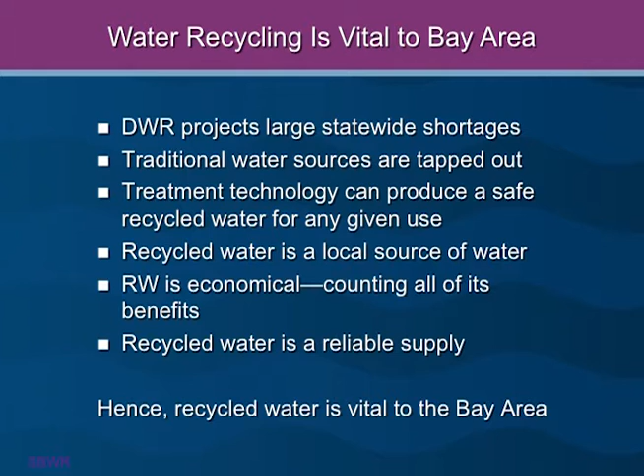Recycled water is a local water resource. We produce the raw material for it, so we are not at the mercy of somebody else to import the water from. It is economical - counting all of its benefits, it is economical. That's why there are over 300 systems like South Bay Water Recycling. South Bay Water Recycling is one of many in the state that does this, and they have been doing it, they continue doing it, and they wouldn't be doing it if it were not economical. Recycled water is a reliable supply, even during drought. As long as we flush the toilets, there is a raw material to produce recycled water and serve it to the customers. Because of all this, recycled water is vital to the Bay Area.

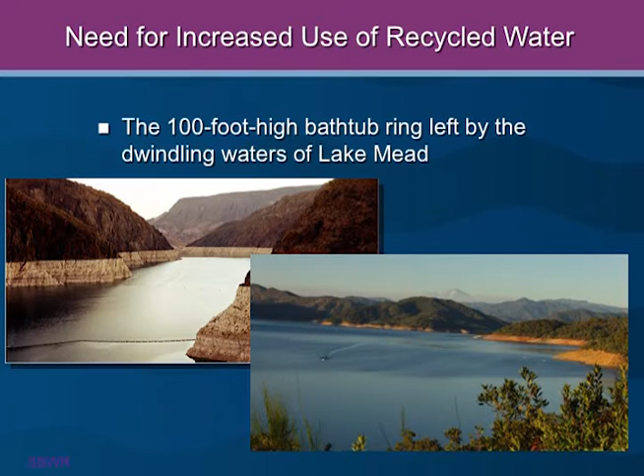Some other pictures. I mentioned the Department of Water Resources projections of water shortage in the future - this is the graphic I promised you. In the year 2000, our shortages were about 3 million acre-feet per year in normal years, going up to drought conditions of 8-9 million acre-feet per year of deficit. An acre-foot of water is a lot of water - it's about 326,000 gallons, so millions of that unit is incredible. An acre-foot can supply 2 families in a year, 3 families in some places. So as the years go by, it gets worse. 2010, 2020, these are projections. I don't have 2030 projections, but if we don't do anything about it, it gets worse every year because our population keeps increasing, our demand for water keeps increasing, and yet our supplies are relatively constant.

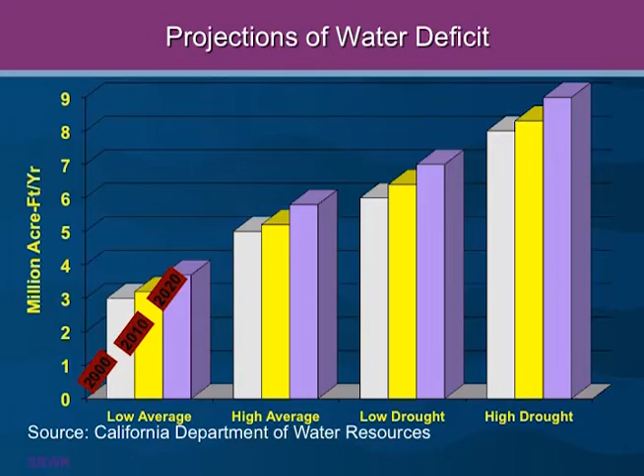So how do we make up for this deficit? There are several things that we can do. The Department of Water Resources projects doing all of these activities in order to make up for those deficits - you can read them for yourself. These are all very big projects, and each one has some yield that can help make up the deficit in future years. Water recycling is a major one of those, and it can make up almost 1.5 million acre-feet per year by the year 2030. That's about half of that normal year deficit of 3 million acre-feet per year that I mentioned. It's quite significant, isn't it? It's a big part of making up our shortfalls. And you should be proud to be part of this system of making up for the deficits in water for our future generations.

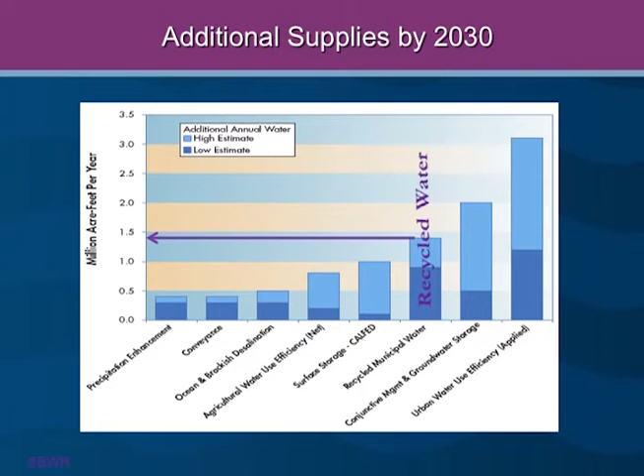What is recycled water? It begins with drinking water. As we drink the water, as we use it for washing, for cooking, for showering, what have you, at homes, businesses, and industries, it becomes wastewater immediately. It's taken into the sewer lines and taken away, carrying all the dirt and the microbes with it, and it goes into a central treatment plant.

In this case, it goes to the San Jose, Santa Clara Joint Wastewater Treatment Facility at the end of Zanker Road. I would invite you to arrange for a tour of the plant. It's a very nice, modern, high-tech treatment facility that produces excellent quality water, and adjoining it is the Silicon Valley water purification system that goes even further and produces even purer water to blend with your recycled water. So it's a good tour to take.

Treated wastewater was historically discharged to the San Francisco Bay at the very bottom. Because of environmental concerns, the water recycling program was initiated to reduce the amount of discharge. But fortunately, it has become a big water resource for us as a result. So it served two purposes. Some of it's now becoming recycled water, and it's used in parks, golf courses, and other places for reuse.

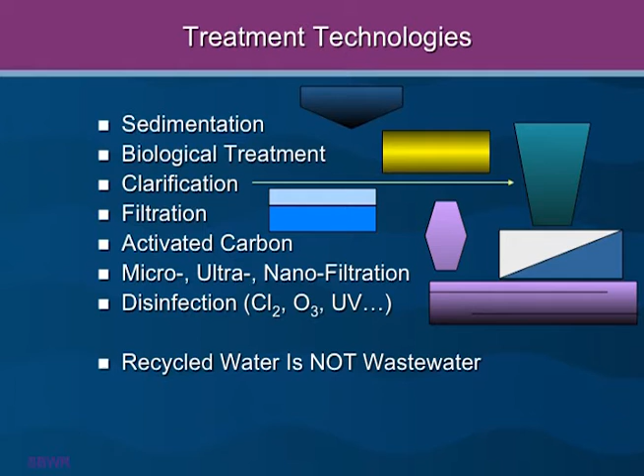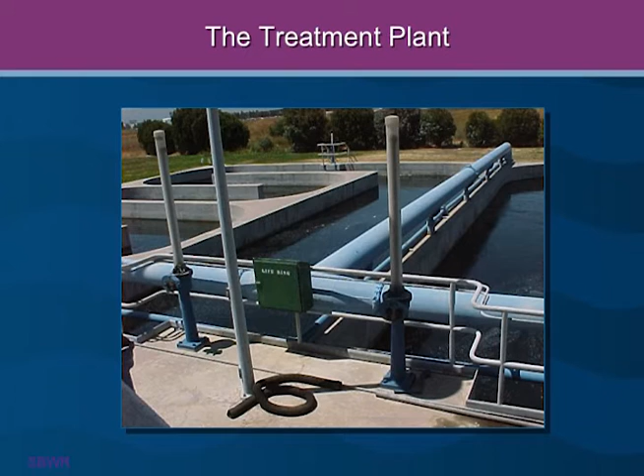This is an image from a portion of the treatment plant at the end of Zanker Road, and again, as I said, it's a good place to visit. This picture shows the biological treatment step that I mentioned. After sedimentation, it goes through biological treatment.

This is where we supply air, in some cases oxygen, from the bottom of the tank, so the air becomes mixed up with the water, and that provides the microbes with the oxygen they need to thrive, to survive, to keep reproducing themselves, and to eat up the organic matter. The organic matter, which is our waste product, is their food. They eat that up, it becomes part of their bodies, they die off, fall to the bottom, and become sludge. Sludge is taken away and buried.

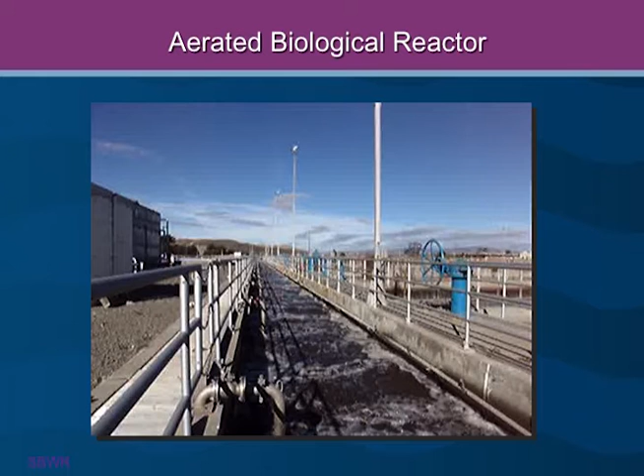So what remains is water that doesn't include the organic nasty stuff that was there in the first place. That's a very important step. Almost every plant includes that step because it's so efficient at removing organic matter.

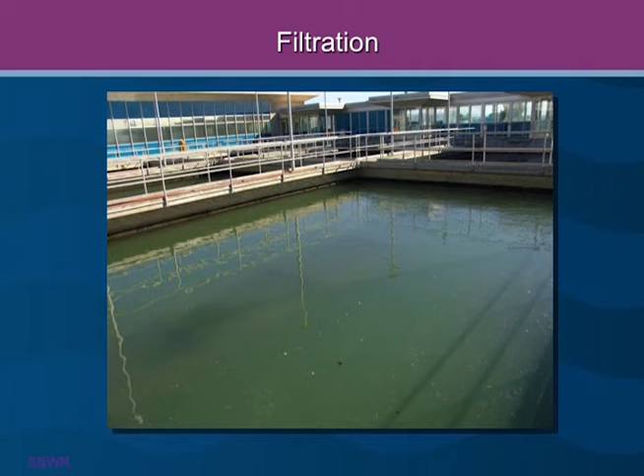Then the filtration step—it looks like a swimming pool, but what's underneath the water is a layer of fine sand about 4 or 5 feet thick, through which it gradually, slowly goes. As it goes through that sand filter, it leaves behind any suspended particles, including bacteria, but not necessarily viruses. Viruses don't get caught, but protozoans, bacteria, and so on get caught.

This disinfection step looks like this: a serpentine path through which the water flows very slowly. It's supposed to provide, by law, at least 90 minutes of contact between the water and the chlorine so that a complete kill is accomplished. And we know that we have accomplished that if our daily measurement indicates less than 2.2 total coliform per 100 ml of water coming out.

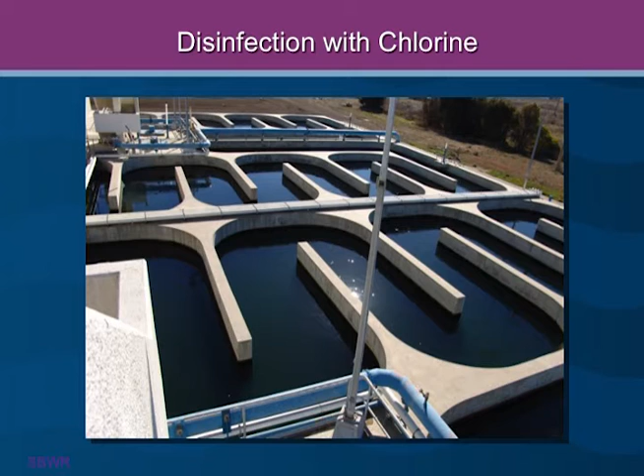That's a standard that is pretty universal for the kind of uses we're talking about here, which are very close to human contact. At the end, we get disinfected tertiary recycled water, which is the kind of water you get at your site. It's clear, you can see through it, and the foaming is because of the chlorine off-gassing as it falls off the weir.

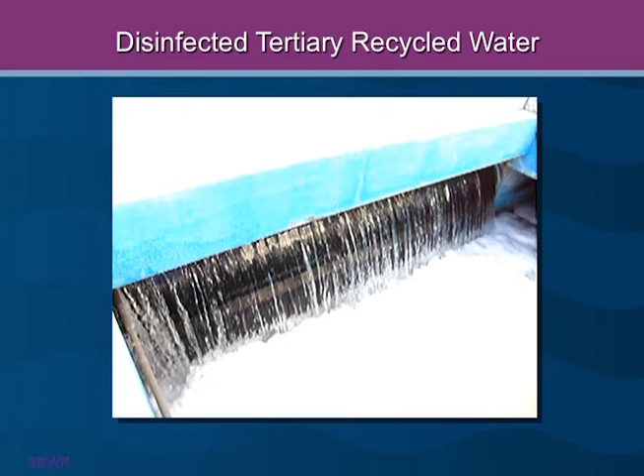What does treatment accomplish? The treatment system accomplishes different things. Each of those steps does something different, and they are all vital. The sedimentation step removes solids, heavy metals, larger particles, and floating stuff that comes in at the beginning of the treatment system. The biological treatment removes the organics—as I said, the organics are eaten up by the microbes; it's their food. That's how we get rid of the organic matter.

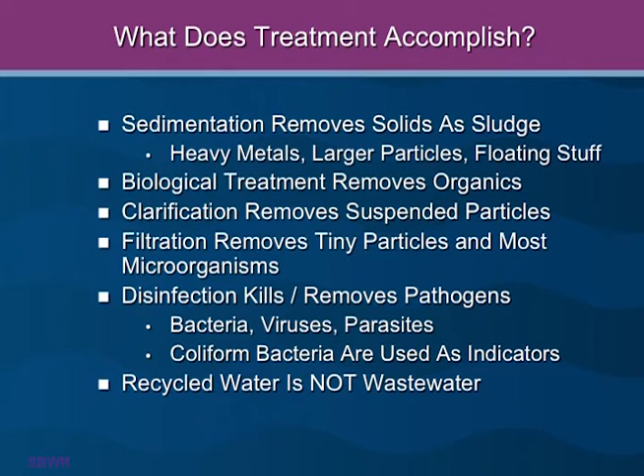The clarification step removes the suspended particles. The filtration step removes any tiny particles still left after the sedimentation and clarification steps, clarifying the water further. Finally, the disinfection step kills, by oxidation, the remaining microorganisms, especially viruses that might survive. So again, I repeat: recycled water is not wastewater and has no relation to it anymore.

The treatment process is shown graphically in this picture. Wastewater comes from businesses and homes. Primary treatment is where the heavy stuff gradually falls down. Looks pretty yucky, doesn't it?

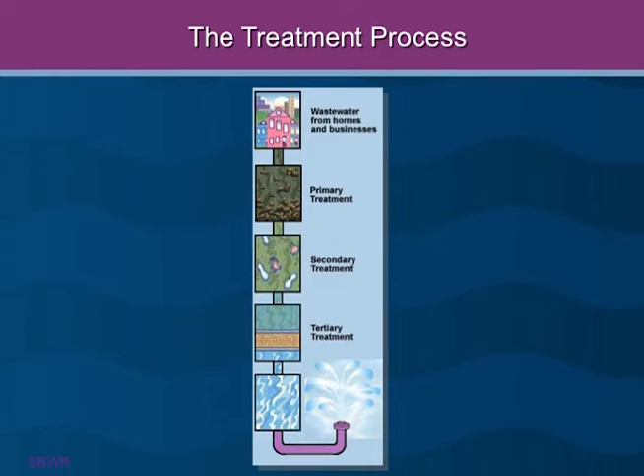The secondary treatment is where microbes work very hard, eating up the organic matter, so after that the yucky stuff is not there anymore. The tertiary treatment is the final step of filtration - water, sand, almost pure water at the end, coming out ready to be used in sprinkler systems, and kids can play in it, no problem.

So treatment is really the magic that produces what you're looking for. We call that first step primary treatment, the second step secondary treatment, and that last step disinfected tertiary treatment - I've highlighted that because that is what you get. These are the kinds of recycled water used for non-potable uses, all the 43 uses enumerated earlier.

There's also what's called potable recycled water. For that, you have to have reverse osmosis, advanced oxidation, and a lot more monitoring and careful processing. And it's coming - stay tuned. In the next 5-10 years, we will probably have potable recycled water in many places in California, possibly here in San Jose as well. And then there's another thing, gray water.

Gray water is not recycled water. Gray water is untreated, non-toilet wastewater. It's still wastewater - it still could contain pathogens. Somebody could have showered who was ill, and some of the microbes got into the water. And some people have the habit of doing certain things in the shower that you're supposed to do in the toilet, so gray water is not necessarily free from fecal matter.

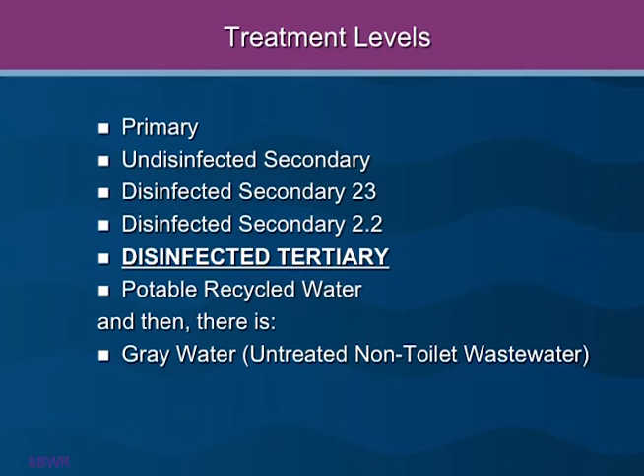But it's allowed to be used as long as it's discharged 2 inches below the soil surface, and there's a whole set of regulations for doing that. But we're not going to go into that - that's not your topic here. However, as the recycled water experts, you need to have that context. Know that gray water is not recycled water.

Gray water is governed by Chapter 16A of the Plumbing Code, and for washing machine effluent, you don't even need a permit. As long as you comply with 12 specific conditions listed in Chapter 16A, you can have a gray water system based on washing machines in your home, no problem. If you want a more complex system, then you've got to get a permit. And as I said, the emitters have got to be at least 2 inches below the soil surface with mulch, and the reason for that is to prevent exposure.

Exposure to microbes is what can cause infection and eventually disease. So if we limit exposure, if we eliminate exposure, we're good. Gray water is not recycled water.

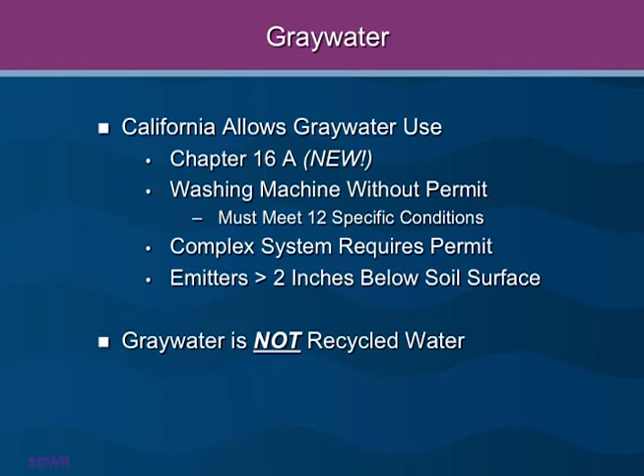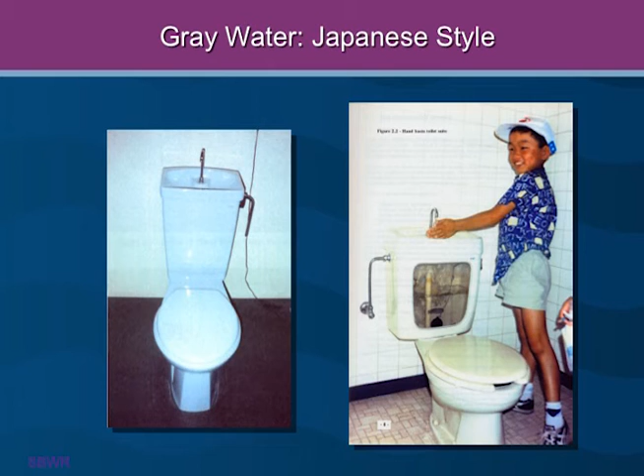Here's a Japanese-style gray water system in which the wash basin for hand washing is built on top of the toilet reservoir, so that the wash water goes in there and serves as the flush for the next flush - double use of the same water. It's very common in Japan. I've seen it in many homes and businesses all over Japan, and in some Australian places too, but in America, we are not allowed to do that yet.

As soon as we use that water, it becomes wastewater immediately. As soon as we take a shower with it, as soon as we wash our hands, it becomes wastewater, goes down to the toilet, and its quality drops from very high to extremely low quality. Now, this is not a quantitative measure of quality - I'm just talking qualitatively here. The quality of this water, whether it's just wash water or toilet water, is very, very low - it's unacceptable. But we give it treatment: primary treatment improves it just a little bit, then we give it secondary treatment.

That's why some uses are allowed with secondary effluent, but not here in San Jose. San Jose only has tertiary. Tertiary is where we bring the quality of water fairly high, very close, but not quite to the level of potable. Then we can add additional treatment, advanced treatment systems, and make it even better than potable water we get today, and those qualities are comparable.

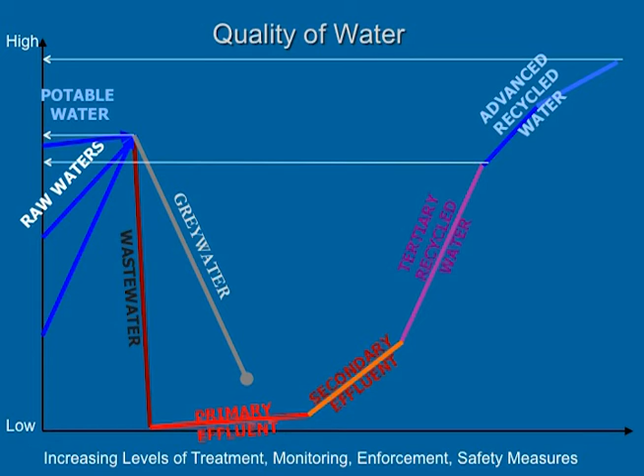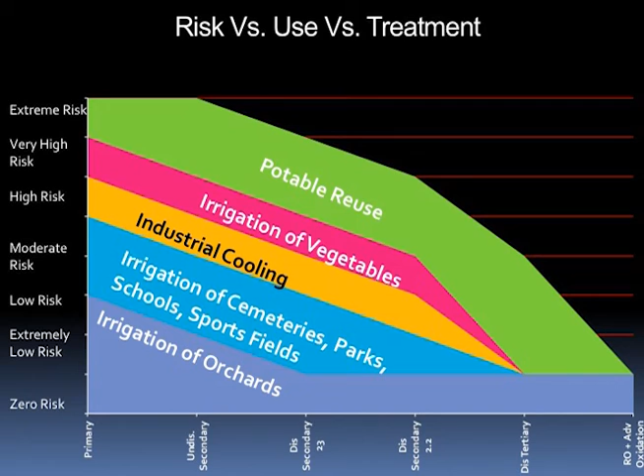Reliability of treatment—as I mentioned, reliability is extremely important, and we have to have multiple barriers in order to achieve it. These multiple barriers are in treatment, disinfection, site controls (especially with lower levels of treatment), cross-connection controls (you'll hear about that next, in the next module from Mike), backflow prevention, and training and management. This training we are doing now is part of those various belts and suspenders we have to make sure water recycling is safe.

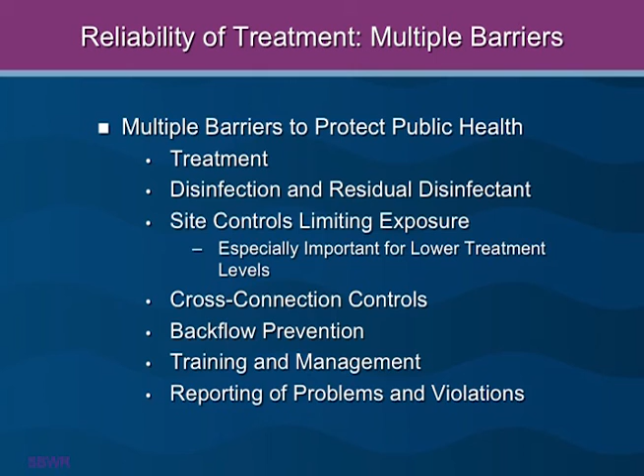Reporting of problems and violations is another thing we do to make sure reliability is accomplished. Currently we have over 700 customers.

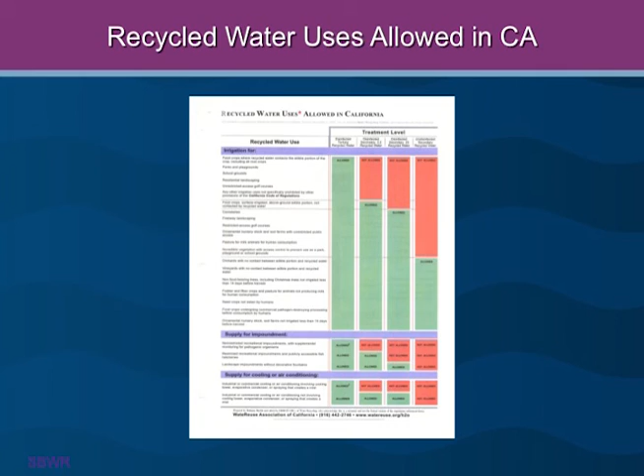So we are increasing our amount of recycled water served to the community very rapidly. The recycled water uses allowed in California—there are 43 allowed uses. We talked about irrigation of all crops, including vegetables, but also landscaping, golf courses, cooling towers, impoundments, which means swimming and wading—a very intimate use of recycled water, which could include gulping—toilet flushing, car washes, and groundwater recharge.

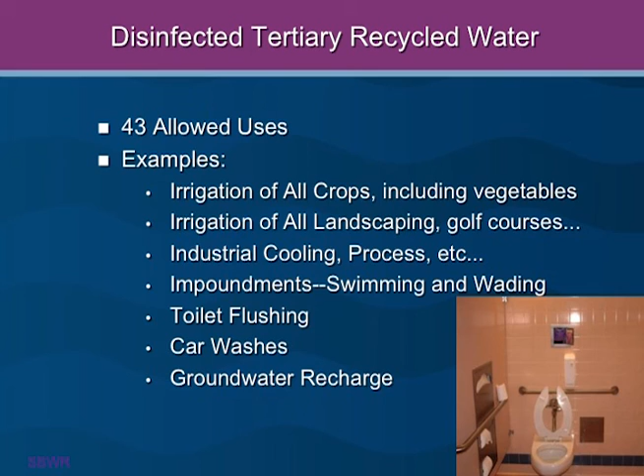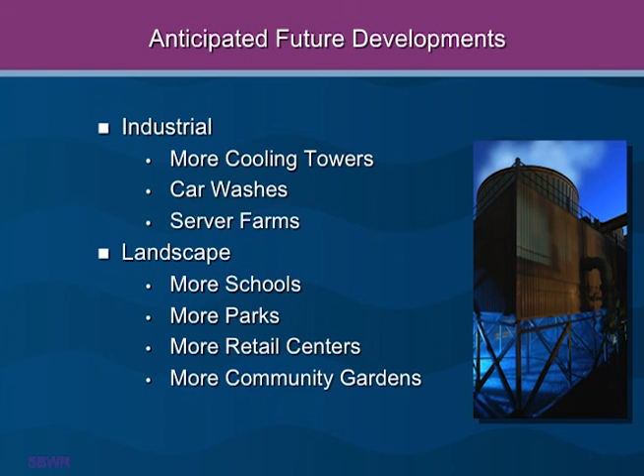In summary, tertiary recycled water is as safe as any other source of water for intended uses. This has been shown in various experiments in various parts of the state, and there's a good demonstration garden at the corner of Taylor and Spring that I would advise you to look at sometime when you're in the area. A couple of hundred different species of landscape material are grown there with recycled water very successfully—it's a good demonstration to look at.

There's a CD produced by the University of California about management of salinity of recycled water. Use of recycled water is endorsed by the Department of Public Health, Water Resources Control Board, Department of Water Resources, and various county environmental health officers—and these are very conservative guys. These county environmental health officers would not allow you to do something risky, but they are endorsing it.

U.S. Bureau of Reclamation, U.S. Environmental Protection Agency, and the task force appointed by the California legislature. This declaration of support I showed you earlier, part of your packet, I would advise you to put it on your bulletin board and show it to anyone who might ask about the safety of recycled water. All these conservative agencies agree to it. It's also endorsed by various medical associations—we're very proud of their endorsements.